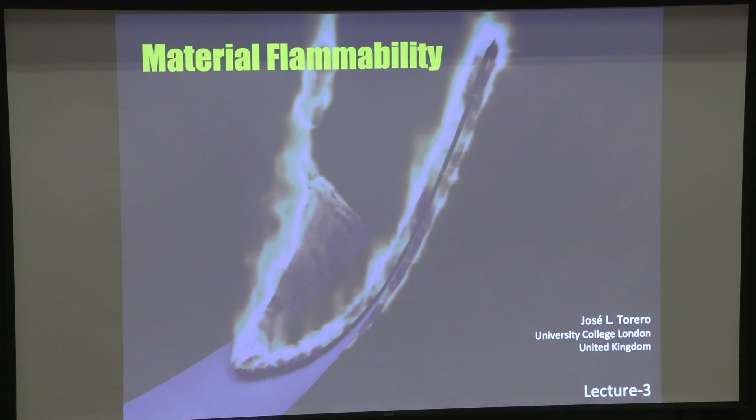And so as I described yesterday, we started the class setting up the entire conservation equations. And very rapidly, you realize that it becomes intractable. It is impossible to actually work the problem.

And so we went to the complete other extreme, where we actually simplified the problem to its minimum expression and substituted everything that we could not calculate by some sort of empirical approach, which of course creates a series of limitations.

Now, what I'm going to try to do is bring you somewhere more towards the middle, where I incorporate more of the physics in a way such that the problem still remains tractable, but the need for these empirical formulations not only is less, but where you actually use it, it is to extract properties that are properties by themselves, so that they don't encompass a multiplicity of physical phenomena, but they're just simply a property.

So, for example, finding methods to calculate an average thermal conductivity of a material that is degrading, which generally is quite a complicated thing to do.

So, in essence, it's sort of trying to move away from this space of the impossible, which is the full resolution of the conservation equations that is completely intractable, because you are resolving nanoscale and nanosecond processes in a domain that basically is of the order of meters and hours. So your entire domain is too big for the time steps and the resolution that you need if you're going to resolve all those equations.

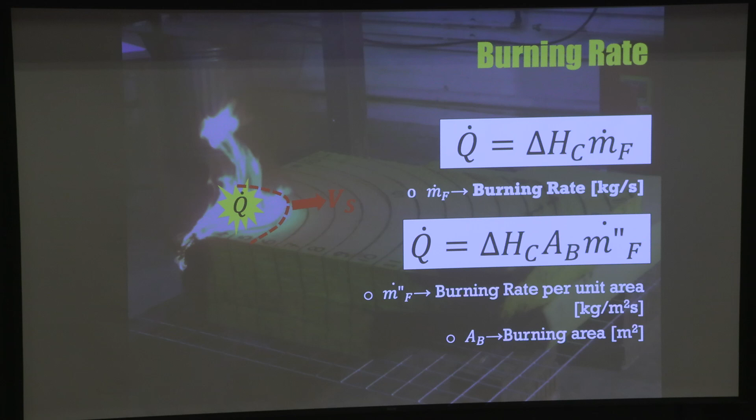So the heat release rate is going to grow in time as a function of how the burning area is increasing in time. And we established the area as a function of a flame spread velocity. We input this into the equations and effectively treated all these terms as material properties.

Pi is obviously a constant. The heat of combustion, we treat it as a constant. The flame spread velocity as a constant and the burning rate as a constant, and therefore lumped all this into a term called alpha. And that basically gave me the dependency of the heat release rate as a function of time. And that's what served as the input to the zone models.

Now, we're going to try to look at this problem in a slightly more refined way. So the material properties, to be introduced in the design fire, that is the one that goes into the zone model, are effectively this: heat of combustion, flame spread velocity, and burning rate.

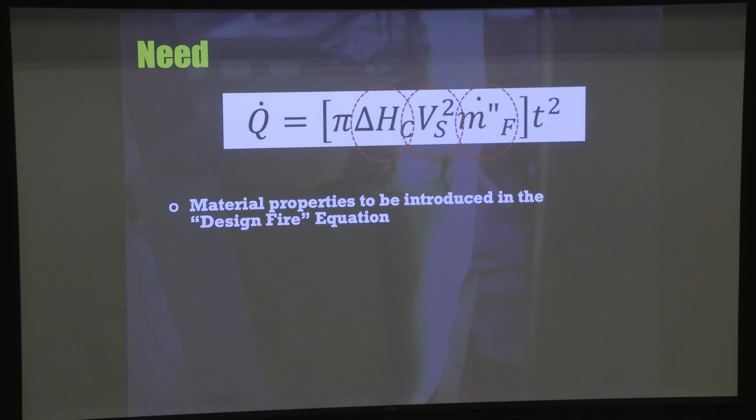Now, what we're going to do is try to use small-scale tests to gather the information about these properties to see effectively how they can be better approximated, as opposed to just simply lump them into a term called alpha. So the information that we're going to extract from this test is much easier to extrapolate so that you can actually predict the value of alpha.

As opposed to just simply getting a value of alpha from a test, you're going to calculate all three components and find the value of alpha in a more refined manner.

So why is this important? Because many materials that we use are going to be evolving rapidly as technology evolves, and as the architectural imagination takes control. So this is an interesting problem.

This is a library, the library of Astana. Astana is the capital of Kazakhstan, and they wanted to create a series of exceptional buildings to adorn this new capital. They moved the capital from Almaty to Astana, and wanted to create all these buildings, and this is one of them.

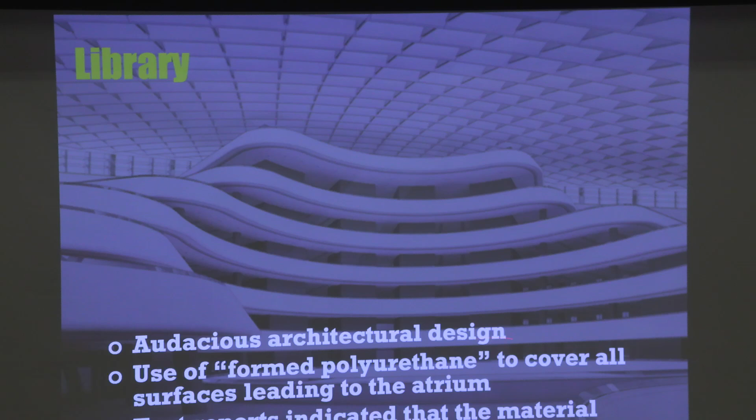The architect is the famous Sir Norman Foster, and he came up with this design, which is a very lightweight lattice ceiling, and every one of these floors represents one level of the library. These smooth surfaces are all made out of molded or formed polyurethane.

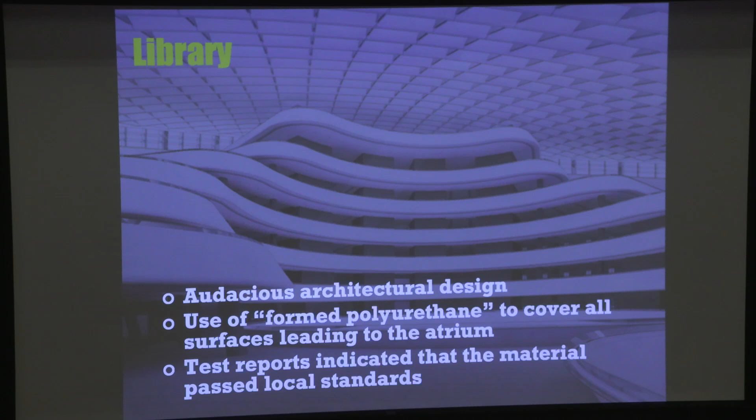Polyurethane can be lightweight, open-cell polyurethane like you have in this chair. The polyurethane in this chair is open-cell, so when you sit and squeeze it, the air comes out. But if you want to make it rigid, you make it closed-cell, and you get the same material, but it's actually very stiff. You can mold it and create these beautiful shapes.

But polyurethane burns, and when it burns it creates a big problem in terms of fire. So what they do is render it with a ceramic, which is there to protect it. The problem is that if you test the components by themselves, they'll tell you the polyurethane is combustible. But if you test it as an ensemble, you can argue that the encapsulated polyurethane is non-combustible. So the question is whether polyurethane encapsulated in ceramic materials can actually be used for a library.

What do you think is the answer? I think you have to be very, very careful, and this is the kind of problem we face. So look how this material behaves when you actually expose it to heat.

The material is called Dekpol, and we tested this.

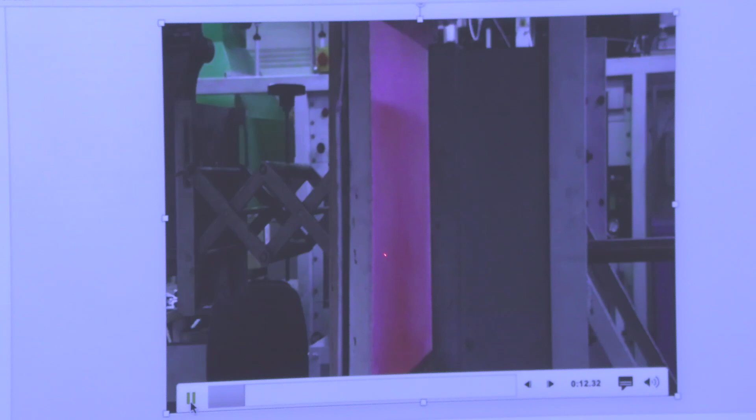So that's the material, and there's a radiant panel radiating heat to it. Very rapidly, little cracks start appearing on the ceramic render, and it starts creating holes. Eventually it exposes the polyurethane, and at some point the polyurethane, now gasifying because it's pyrolyzing, is going to ignite, and you get a big flame. Now imagine the whole library cladded with this -- you'd have a very, very significant problem. These are the kinds of things we want to understand.

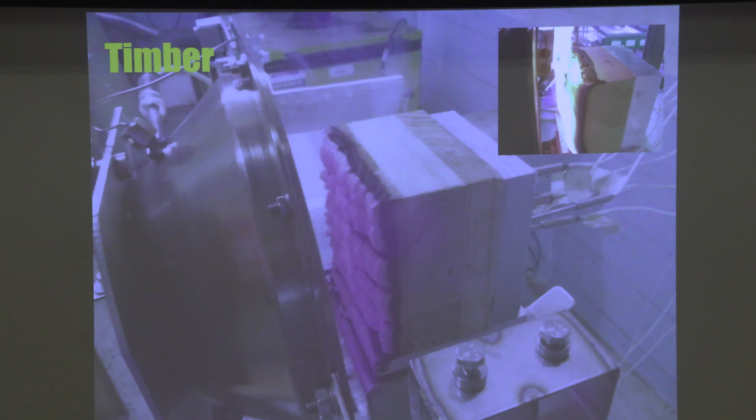Now you have a whole bunch of processes happening. You're going to have a drying wave -- you can see the line that is drying here, and here. It releases the moisture of the timber, followed by the pyrolysis, followed by the char oxidation. This is a heater providing enough heat, so you can see the ash forming on the surface, then the charred part, then the pyrolysis front, and right around here the moisture front. These materials all behave in complicated ways.

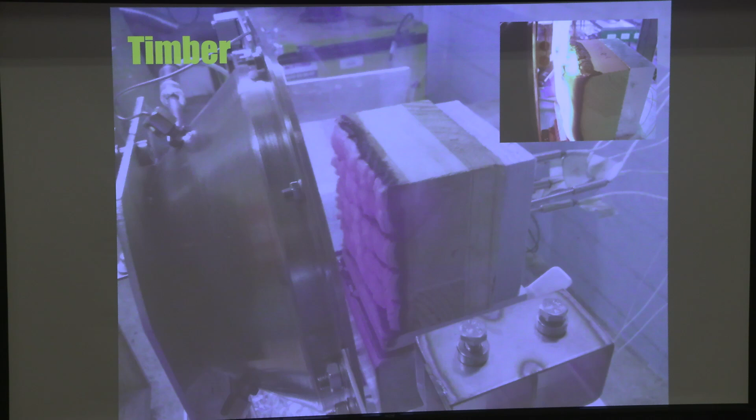Now, when you arrange them in a complex way in a building, they behave in a different way. So let's see if this works.

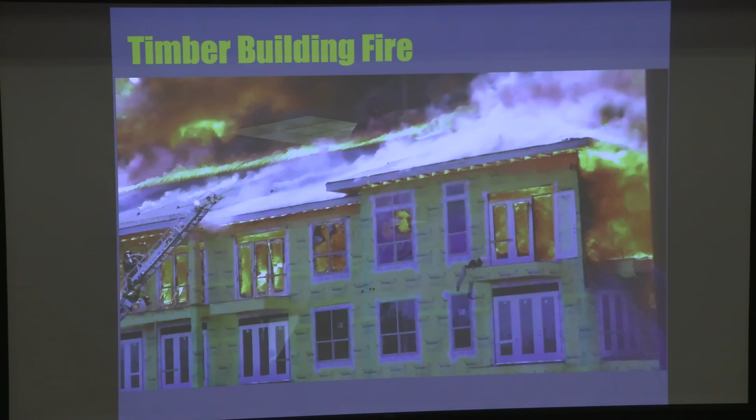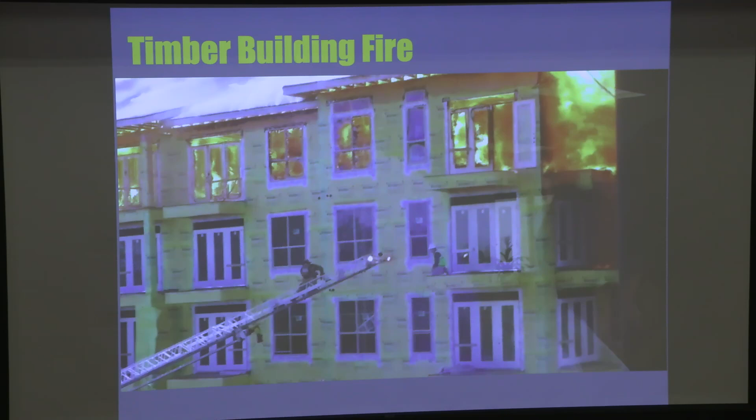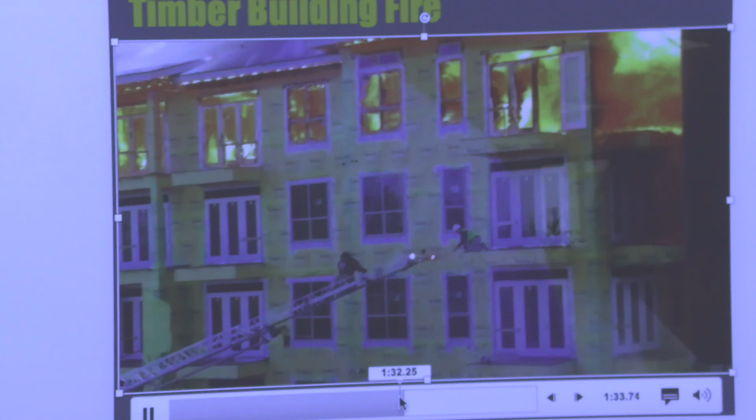Oh, you may not be able to... you can jump from there. I mean, good grief. I'd be jumping, man.

They need to move that truck up. Oh my God, I don't know why they're not evacuating this. I think we probably should be going. It's not time to evacuate, guys.

Just jump for it, man. Hell yes. Oh, thank Jesus. Thank you, God.

Oh my God. Oh no, my God. Oh.

Hey, what about this guy? What about this guy? They got him. Oh, okay. Oh yeah, it's hot. Oh Jesus, did you feel the heat? I think it's time for us.

As you can see, timber can be a massive problem, and all these things need to be characterized properly. For that, we need more than this very simple approach—fire growth models don't apply to any of these things. We need to dig deeper and find things that are inherent to the materials themselves, not necessarily combinations of different physical parameters.

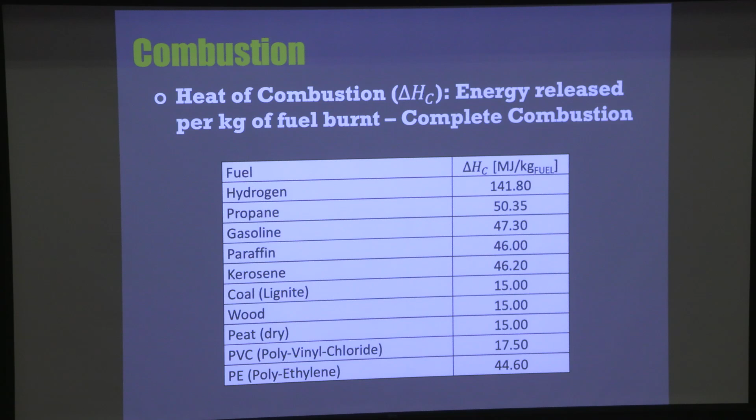Now, we said that the heat of combustion was straightforward—we can do bomb calorimetry and find those values with no problem, so I'm not going to bother with that anymore. In essence, I have three things to find, and this one I already have, so I'm not going to worry about that one.

So let's look at the flame spread. How do I actually estimate the flame spread? This is a little bit of a tricky problem, because flame spread velocities depend on a multiplicity of different things. We need to understand what physical parameters govern flame spread, to see what are parameters and what are physical processes.

The same thing is going to happen with the burning rate. The burning rate has a lot to do with in-depth heat transfer and the chemistry of pyrolysis of the material, and is therefore subject to a number of physical and chemical processes. But at the same time, there are certain parameters that I can extract to produce a model for the burning rate.

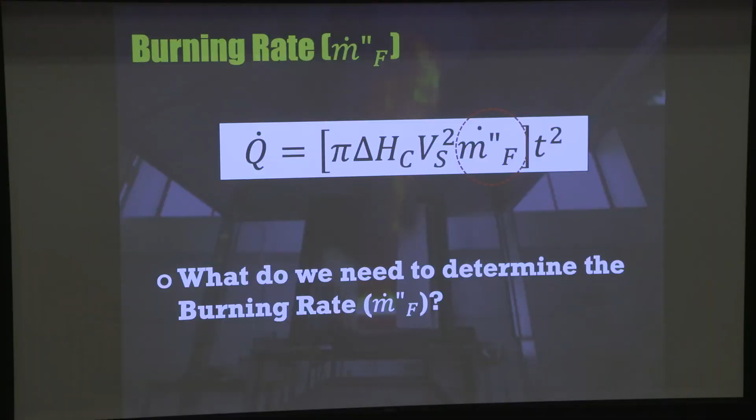This scenario is called opposed flame spread, because the flame is moving in one direction while the air and fuel are moving in the opposite direction towards the flame. If you stand in a frame of reference at the leading edge of the flame, the air and fuel will be moving towards the flame, in opposite direction to the spread.

Now, there was a big debate in the 1970s about in which direction the heat goes through. There was a whole group of people led by Forman Williams, who effectively said that the dominant mode of heat transfer is through the gas phase. And there was a whole other group of people led by this gentleman in Spain called Sánchez Tarifa, who believed that the majority of the heat went through conduction, through the solid phase.

To settle the dispute, Sánchez Tarifa, who was cousins with Amable Liñán, who was very friendly with Forman Williams, decided to send his nephew, Carlos Fernández-Pello, to work with Forman Williams. The result of that collaboration is a very, very famous paper called 'Controlling Mechanisms of Flame Spread,' where, of course, as you can imagine, Forman Williams was right, and from then on, people consider that the major form of heat transfer is from the flame through the gas phase and through the surface of the solid.

Now, years later, people have been doing massive amounts of experiments, and what you end up realizing is, of course, if I increase the thermal conductivity of the material massively, in some cases it can be through the solid. And in most cases, a combination of both.

But let's assume that the heat is going in this direction, through the gas phase. Most fire-related materials will have low enough thermal conductivities that generally the majority of the heat comes in through the gas phase. So energy comes in through the gas phase and is delivered to the solid to bring its temperature from ambient temperature to the pyrolysis temperature or the ignition temperature. And when that happens, the flame can jump to this point and effectively has spread, and that happens at a velocity Vs.

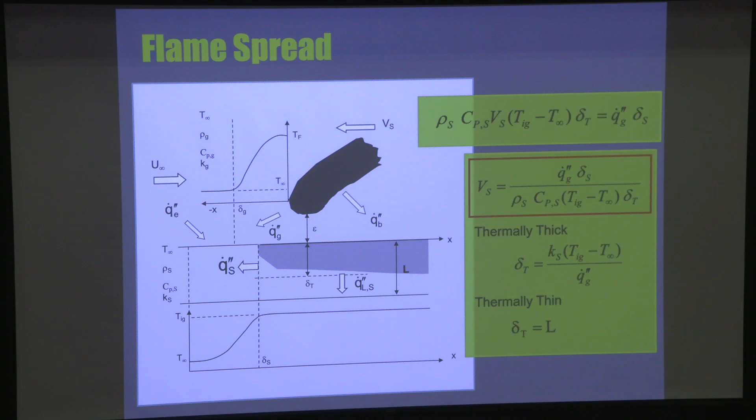And I can substitute this into this equation here and calculate the flame spread velocity. Now, if you look at the model, while it's very, very simple, it does capture the physics. And it leaves you with parameters that are real. So the parameters are Cp, K, all these are things that actually are true material properties.

Not the flame spread velocity as a material property, because the flame spread velocity is not a material property. Because if I change the velocity of the air, for example, I will change the value of the flame spread velocity. If I change the orientation, I would change the value of the flame spread velocity. Now, all the terms in here, to some extent, represent material properties.

Now, the only problem here is that some of these parameters I cannot calculate. So the heat flux from the flame, I can probably estimate, but I cannot calculate properly. And these heating lengths, again, are actually a little bit complicated to establish, and they are not material properties either. So this is better than what I had before, but it's still not a complete picture.

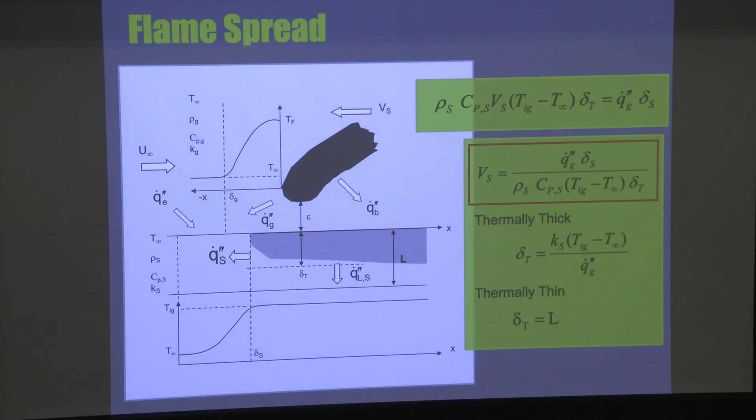Now, obviously, depending on the materials, you will have to see if it's thermally thick or thermally thin. And I presume you've all taken some heat transfer class, so I'm not going to dwell too much on this.

But effectively, we use the boundary condition to calculate a Biot number. So basically, the thermal boundary condition at the surface, convection equals to conduction. Then I linearize the terms, and then I set up the ratio of the gradients, and what emerges on the other side is the Biot number. And the Biot number basically tells me whether it is thermally thin or thermally thick.

In a thermally thin material, the entire material is more or less at the same temperature, so Ts minus Tb is almost 0, and the difference between Ts and the hot gases is very large, so your Biot number tends to 0. It's much, much less than 1.

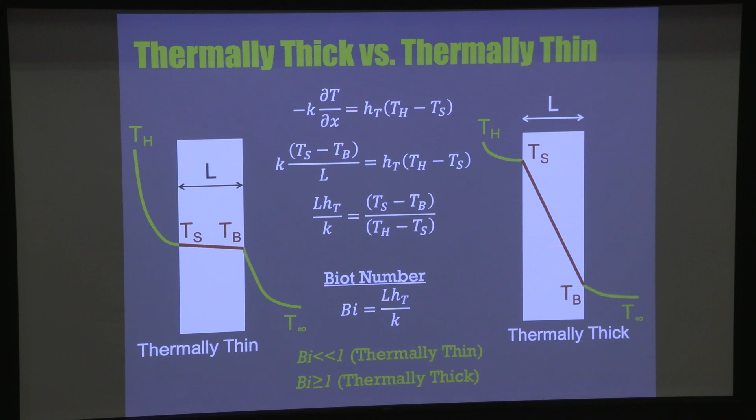Well, if you have this case, which is the thermally thick, the Ts minus Tb is very big, while Th minus Ts is very small, so you get a big number divided by a small number, your Biot number is much greater than 1. So for fire problems, most materials are thermally thick, okay? So generally, we're going to be operating with thermally thick materials, but we can verify it using a Biot number.

So as I said, if most materials are thermally thick, I can take the equation for delta T with the linearized conduction and plug it into this term here, and I get an expression for the flame spread velocity.

Now, that expression for the flame spread velocity has the thermal properties of the material, which are real properties, the ignition temperature or pyrolysis temperature of the material, which is a material property because it's the way in which the chemistry gets degraded and when I consider that I start pyrolyzing the material. Now, it is not a fundamental property, but it is a good approximation to have an ignition temperature.

And then this weird oddity here, that is the combination of the heat supply times the area through which the heat comes through. And that becomes really the most complicated part of the whole problem.

Here I have an expression for the flame spread velocity. The way I'm going to handle it is I'm going to lump this into what I call the flame spread parameter, phi.

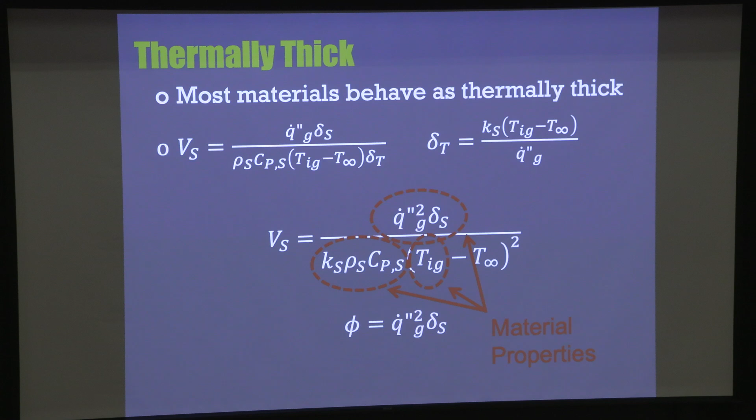If I just take simple timber, this is a bit of a mess. There's going to be a lot of phenomena. You're going to have smoldering at the surface creating heat feedback, degradation chemistry, heat transfer, mass transfer of fuel coming out and oxygen diffusing in. You're going to have water evaporation, which is not a very homogeneous process because, for example, in the nodes of the timber, you get privileged migration of water. So it's a very complicated problem.

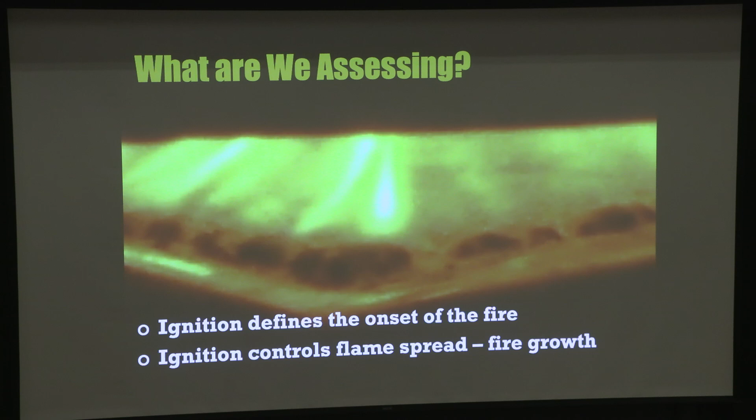So that simple expression that I've created for flame spread is one that already simplifies the problem enormously. So what are we assessing here? Ignition defines the onset of the fire. Ignition is going to control the flame spread because it is in the equation. But ignition is very complicated.

If I look at a piece of timber and all the different phenomena occurring in it, you're going to have diffusion of oxygen to the inside, pyrolysis gases coming out, changes in concentration of the fuel, changes in concentration of the oxygen, and radiative losses from the surface.

You might be applying a heat flux from the outside, you get convective heat transfer, a temperature gradient to the inside, and a change of permeability of the material as you progress inside. Very close to the surface, the material is very porous, so the permeability is high, but as you get deeper in the timber, the permeability decreases up to the point where it's actually negligible. Together with all this phenomena, you're going to get things like cracking, which is mechanical behavior that is very difficult to predict.

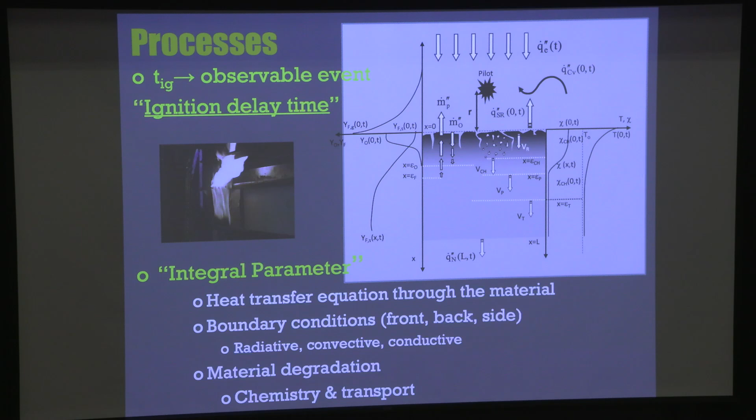So this is not an easy problem. Again, we have to try to simplify it, and we're going to treat it first as a one-dimensional problem where we impose a heat flux. There are losses at the back, and I'm going to try to resolve this problem for a constant heat flux.

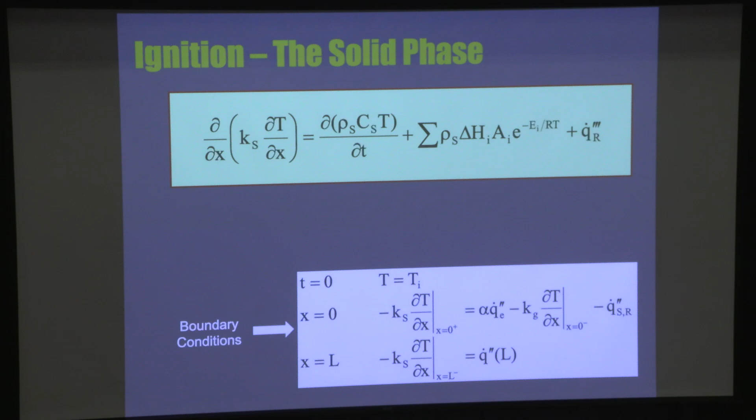The energy equation is going to be conductive heat transfer, the change of enthalpy, the energy absorbed by the pyrolysis reaction in an Arrhenius form, where delta H-i is each pyrolysis reaction, because you will have multiple pyrolysis reactions occurring, multiple steps. Some materials will actually absorb radiation in depth - for example, many plastics will allow radiation to go in depth into the material, so you have to treat this as an absorption term occurring in every control volume. So you're going to have conduction, generation, in-depth radiation, and energy accumulated.

Your boundary conditions are going to be an initial condition, t equals 0, T equals Ti. At the surface, you are going to impose an external heat flux that partially is going to be absorbed if the absorptivity is alpha. You're going to have heat losses to the gas that you can approximate as convection, but let's assume it's the correct term, which is conduction to the gas because you have a non-slip condition, and basically surface re-radiation, which is radiation from the surface to the outside. In the back, you will have some generic term of heat losses. That's the equation that you need to solve.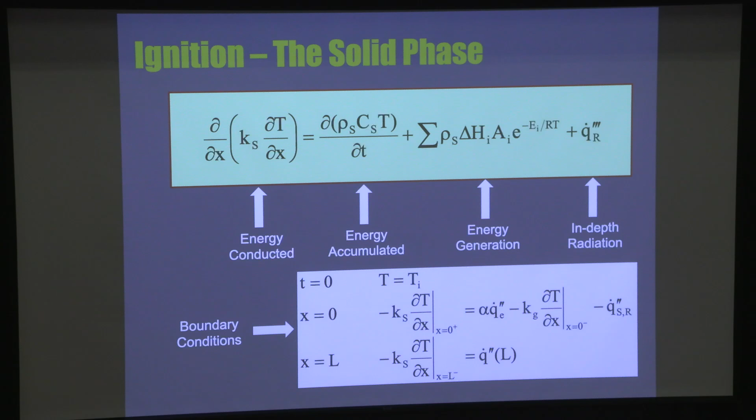Again, I've already simplified a number of phenomena, haven't taken into account any of the mechanical phenomena, just simply taken into account the thermal aspects of it. Now, what I want to get is the amount of fuel that is being produced, because that's what's going to react with the oxidizer to produce the flame. That amount of fuel being produced is the summation of all the Arrhenius expressions representing pyrolysis, multiplied by the fuel concentration, a mass fraction, because part of the fuel will actually be oxidized in depth.

So this number is not going to be 1, okay? It's going to be a number that approximates 1, but it's not going to be 1. Many times, the pyrolysis reactions come accompanied by some oxidation reactions, so what you're going to get is only a fraction of it that comes out as combustible.

And then you will have some CO2, some CO coming out, accompanied by the permeability. Depending on where you are in depth, you're going to have a different permeability, and therefore you need to solve this. Now, this permeability function, again, is very difficult to obtain, and you have to integrate through the depth of the material. So basically, that's the set of equations.

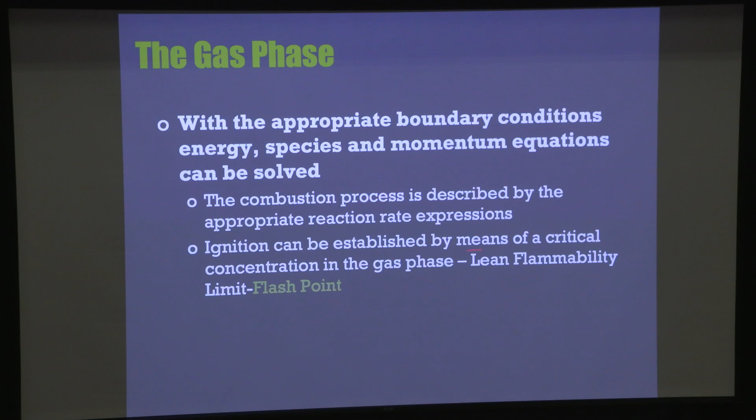Now, in the gas phase, with the appropriate boundary conditions, you can probably use CFD and solve what is happening at the flame level. The combustion process can be described by the appropriate reaction rates, and ignition can be established by means of a critical concentration in the gas phase. In other words, when you reach the lean flammability limit, that's what I described on Wednesday as a flash point.

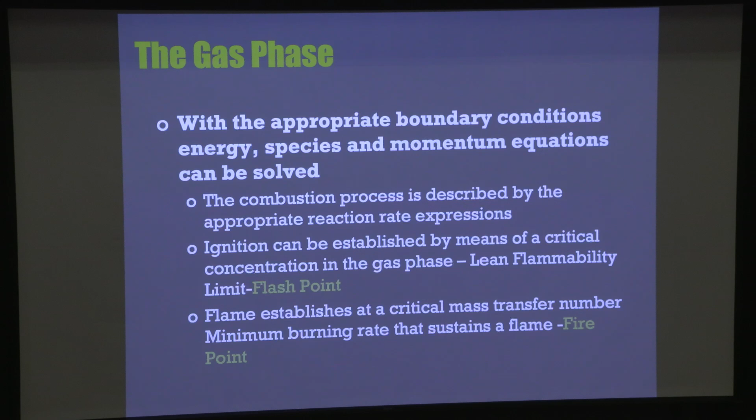So then the flame establishes, you get the flash, and then if you have sufficient amount of fuel burning, the temperature of the flame is sufficiently high, and the flame stabilizes, and that is called the fire point, which is when you actually don't get a flash, but you get a stable flame established on top of the material. And that is more related to a critical mass transfer number, because the heat being fed back to the material has to be more than what you need to pyrolyze the material, so that you get the stable flame.

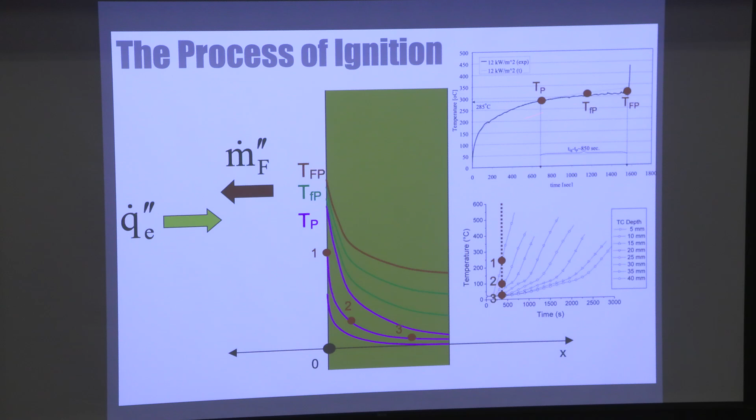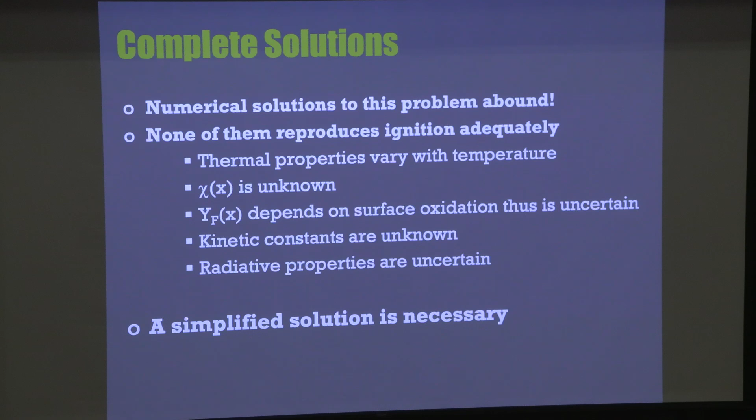So, in essence, complete solutions are very difficult, so I need a simplified solution, and I'm going to use this concept of inert heating as the way to achieve that simplified solution. So effectively, what is what I do?

Ignition delay time, the time it takes from exposure to ignition of a flame, which is a visible event, is going to be the time it takes to reach pyrolysis, then the time it takes to have a flammable mixture, and the time it takes to heat up the flammable mixture until it ignites.

So the first thing I'm going to do is ignore this TI, the induction time, by introducing a pilot. So the moment I get a flammable mixture, it ignites. That's really good because it gives me consistency in the data, since having a pilot, I'm not subject to, for example, the difficulties of heating a gas where you have a buoyant flow that can be quite complicated. So effectively, I can make this one neglectable.

This has been evaluated by a number of people, and it's been shown to be less than 5% of the heating time, because the heating time until pyrolysis is the heating of a solid. So it's actually a very long period of time compared to reaching a flammable limit, which is basically the Arrhenius equation taking off, and that happens very rapidly. So basically, Tm and Ti become neglectable, and the moment you reach pyrolysis can be assumed as the ignition point.

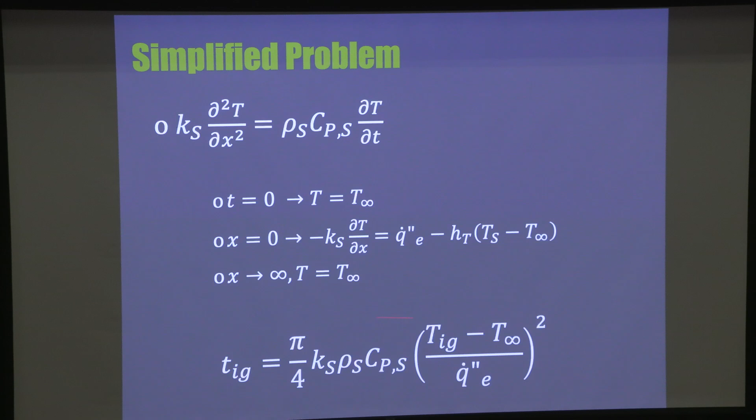So this is the equation to be solved, the transient heating equation, and these are the boundary conditions. Now why am I doing this? Because I can solve this. I can do a Laplace transformation and a Taylor series expansion, and get an analytical solution. This equation, presented in this form, has a closed form solution, and therefore allows me to come up with an answer for the ignition delay time.

Now when you look at the ignition delay time and the answer, here you have the product of the thermal conductivity, the density, and the specific heat, which is the same thing you saw in the flame spread equation. You have T ignition minus T infinity, which is the same thing you saw in the flame spread equation, and this is the external heat flux that you are applying.

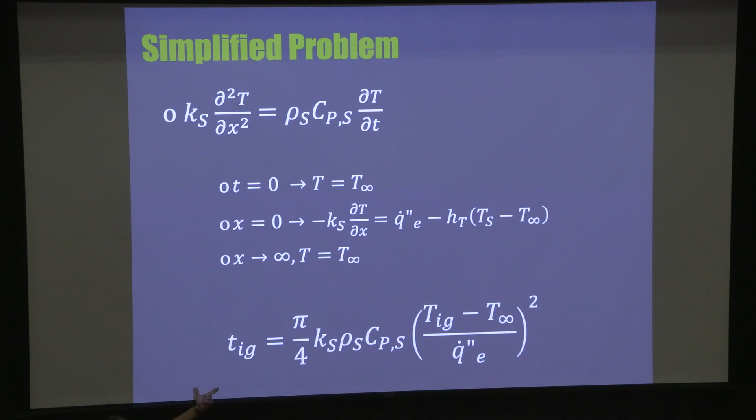Now, the ignition delay time is something I can observe. This is something I can measure, and I can measure it very accurately. So imagine you have a solid that you want to test. You have a radiant panel that provides a constant heat flux, and you put a shield, so that shield keeps it cold.

And then at some point, time equals 0, you remove the shield, and then you wait until a flame ignites with a pilot at the top to make your induction time negligible. So I can measure the time to ignition in a very precise way.

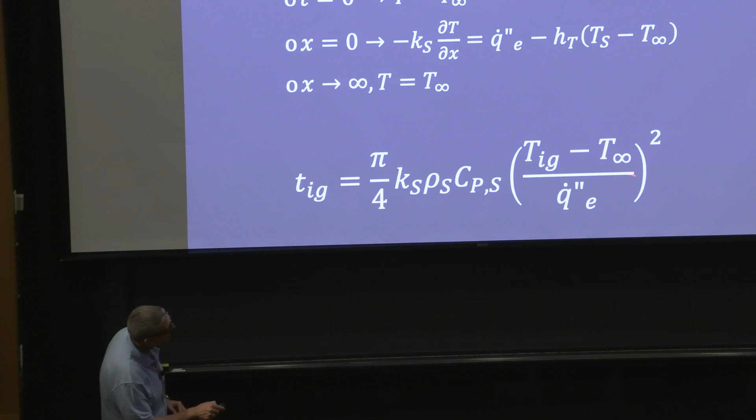So this becomes measurable because I'm imposing the heat flux, and I can do it for a lot of heat fluxes. So I can change the heat flux and repeat the experiment and measure this in a very simple, observable way.

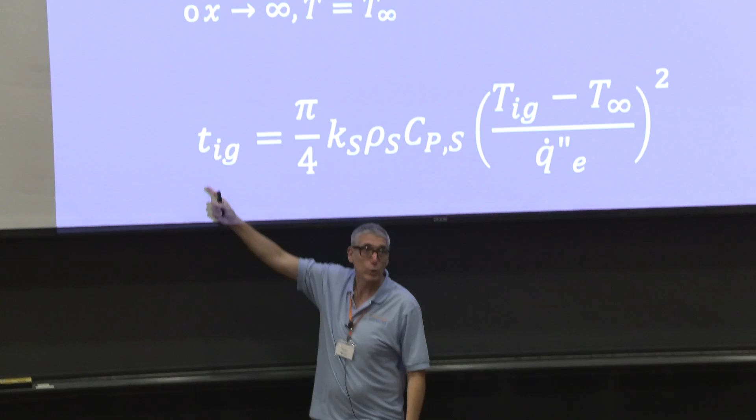As a result, by knowing this too, all that I need is 2 data points to be able to solve this equation. So I put a heat flux of 20 kilowatts per meter squared, and I measure an ignition delay time of 400 seconds. Then I put 40, and I measure an ignition delay time of 200 seconds.

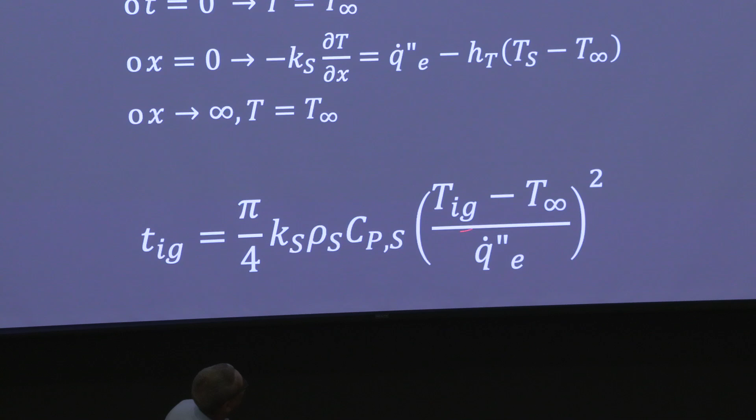Now, with 2 equations and 2 unknowns, I get the thermal inertia, and I get the ignition temperature, which are the 2 things that I need to plug into my flame spread equation. So the material properties end up being this, and I'm going to run tests to find this, which allows me now to calculate the flame spread velocity.

So the burning rate is a little bit more complicated. Again, it's the burning rate per unit volume multiplied by the volume, and you have to add the whole thing, but generally it follows a pretty complicated plot that evolves in time.

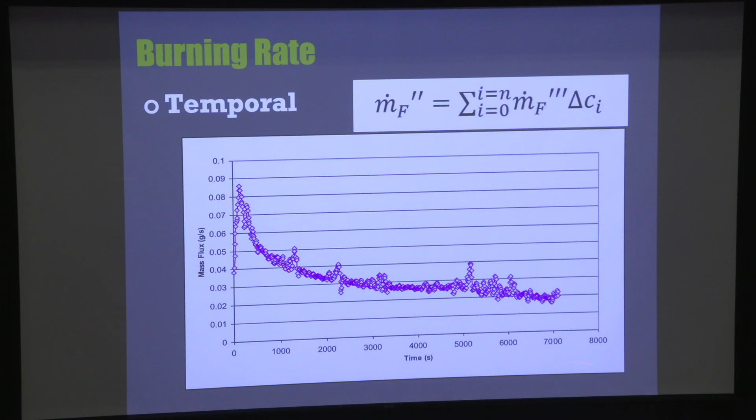The way I normally assess this is by indirect measurement, and this is what we call oxygen consumption calorimetry, and it is the heat release rate. So it's an indirect measurement. So how do you obtain it?

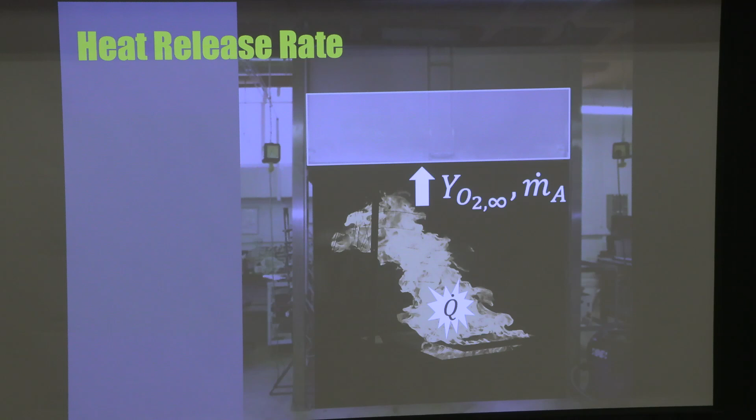Basically, you measure the heat release rate, and you do it not by putting a load cell or a scale, but by actually measuring how much oxygen gets consumed. So if I measure the mass fraction of oxygen in and out of a control volume, and I know what the mass flow rate is, I can actually establish the heat release rate. So this is what I'm going to be measuring, and this is a much more precise measurement than measuring the burning rate.

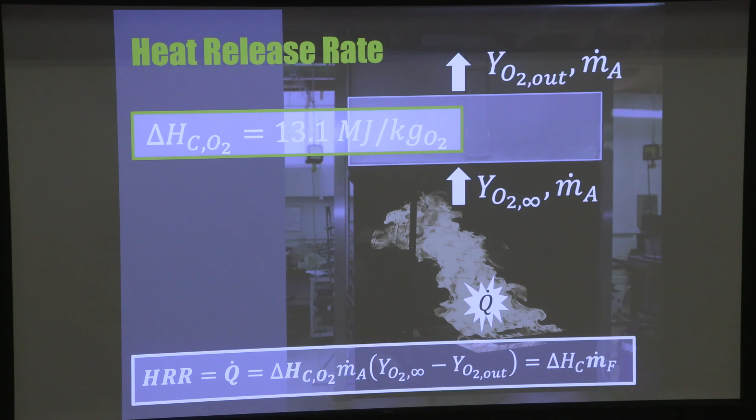Now, I need to find the heat of combustion per kilogram of oxygen, which is effectively a constant value. The same way that you have the heat of combustion per kilogram of fuel, if you put your equation, you can convert it into the heat of combustion per kilogram of oxygen. That gives you a constant value independent of the fuel.

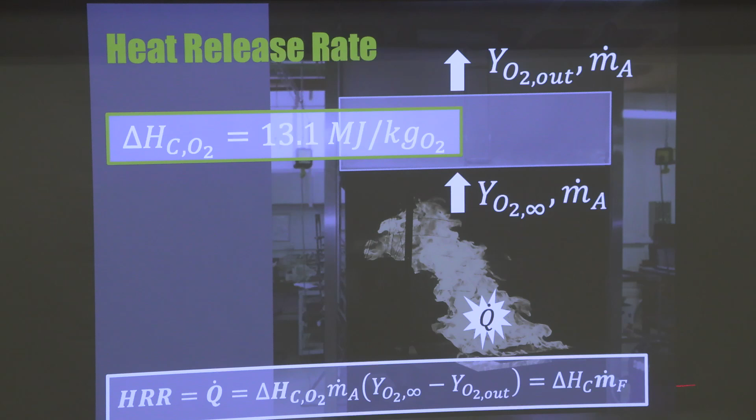So by doing so, I can measure the burning rate in an indirect way, which gives me the final parameter. As you can see, these things can be obtained in a way that is more precise than the alpha that we originally had.

And so instead of having everything lumped into an alpha, now I'm going to use the material flammability properties, and I'm going to have a more precise system that actually allows me to calculate things in a correct way. Again, I'm not saying that this is a complete analysis. I'm saying it's the next level of precision.

Now, a lot of these material flammability properties that you have in here repeat themselves in the different parameters, so I have 1, 2, 3, and 4, and I need to be able to establish them correctly.

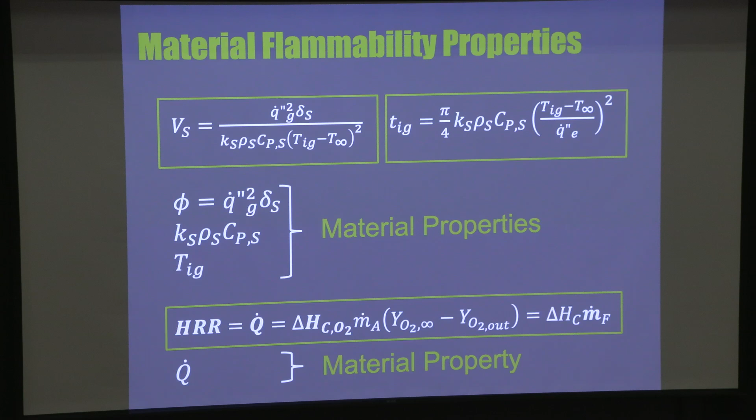So instead of having this very simple, coarse expression, now what I have is a series of equations that have a lot more physics in it, and where the parameters that I'm calculating are actually closer to being parameters, and not necessarily complex physical phenomena.

So what I'm going to do now is show you how it's done in a standardized way. These things have been standardized so that people can repeat them and verify them in an appropriate way. And I'm going to look at ignitions of both liquids and solids, and how you find these different parameters.

So the simplest of them all is the liquids. I don't know if you're familiar with this. This is a Pensky-Martens closed cup test, and basically gives you the flash point temperature.

Now, what it is, is just literally a bucket that has a little fan in there that is stirring this so that it's a constant temperature. And you provide a little bit of heat from the bottom until you reach a certain temperature. Then you turn this knob around, it opens a little window, it puts a pilot flame, and if you get a flash, that basically means you have attained the ignition temperature. And basically what that reflects is that at the opening, you are at the lean flammability limit.

Now, in the case of liquids, there is no pyrolysis, so this is dominated by thermodynamic equilibrium, so it's Clausius-Clapeyron.

As you increase the temperature, the equilibrium concentration increases until eventually you reach the flammability limit. At that moment, when you reach the flammability limit, the moment that you put the pilot, you will get a flash. That's what's characterized as the flash point temperature.

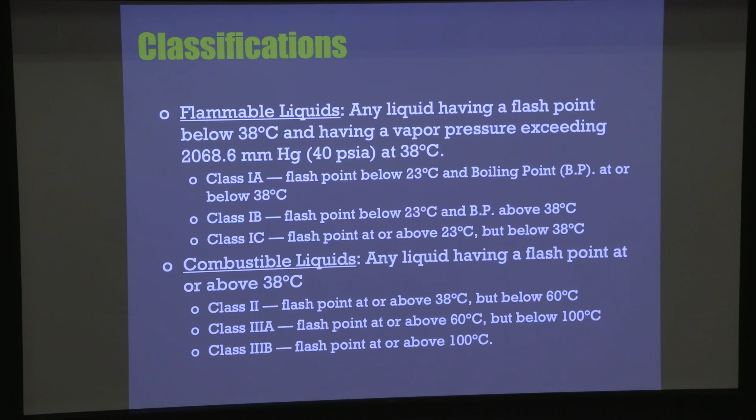Now, what is the practical value of this? You use it for classifications. So it's straightforward. For example, if you have class 1A, the flash point is below 23 and the boiling point below 38. So what does that mean? If I have a material that has a flash point of 23, what is going to happen when you try to store that material?

If you leave it there, it's going to evaporate, and at ambient temperature it's going to produce a flammable mixture, which effectively represents an explosion hazard. Is that okay?

So from the perspective of storage, what do you have to do with materials of the type class 1A? Well, you can bring the temperature down, put them in a refrigerator, below the flash point temperature. The alternative is you enclose them. Enclosures have to be completely sealed, because you cannot have that.

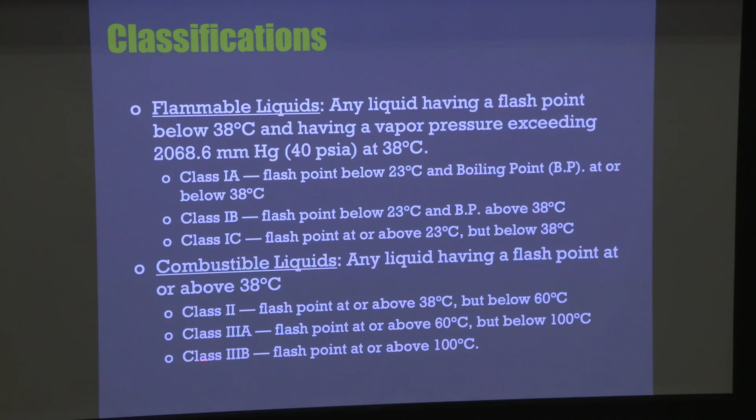Now, as the flash point increases, and you go to flash point at or above 100, these materials, for example 3B, can be stored open, because they will never produce an explosive hazard. So people use this for storage, and NFPA has these ratings that determine what kind of storage you're going to have, depending on the flash point and the boiling point.

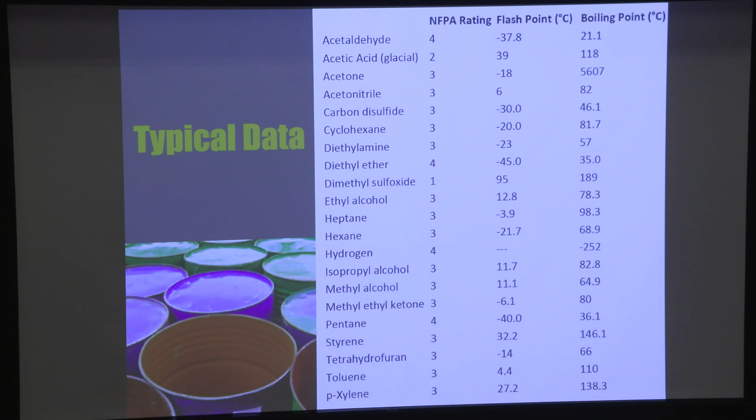Now, why is the boiling point important? Because the lower the boiling point is, the lower the point where you're going to have a massive amount of combustible gases that come out. It's more a reflection of the magnitude of the problem.

So let me look at the test. This is, again, a standardized way of dealing with this problem. This is a standard test, the lateral ignition and flame spread test, and it corresponds to two tests: an ignition test and a flame spread test. The ignition test is a small sample placed in front of a radiant panel that gives the sample a constant heat flux, corresponding to the equation I described before.

Now, the flame spread test has exactly the same arrangement, but now you have a long sample that goes all the way down, and the radiant heater is tilted, so you get a distribution of heat along the direction of the sample. If you're close to the ignition area you have a constant heat flux, very high, but as you progress away, the heat flux decays, so you're measuring the flame spread velocity as the external heat flux goes down. That allows you in one test to collect a number of data points for different values of the external heat flux. This is a standardized test, as I said, using the concepts I described before, but done in a standard way.

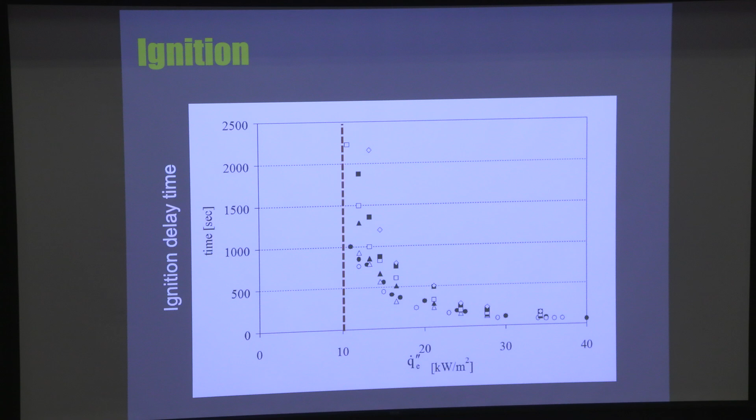So the equation that I showed you corresponds to this type of test data. As I increase the external heat flux, the ignition delay time is going to shrink. As you get to very low heat fluxes, the ignition delay time eventually reaches an asymptote and goes to infinity. So if I look at the data, there's the asymptote, in this case around 10. That's what we call the critical heat flux for ignition, labeled Q0 ignition.

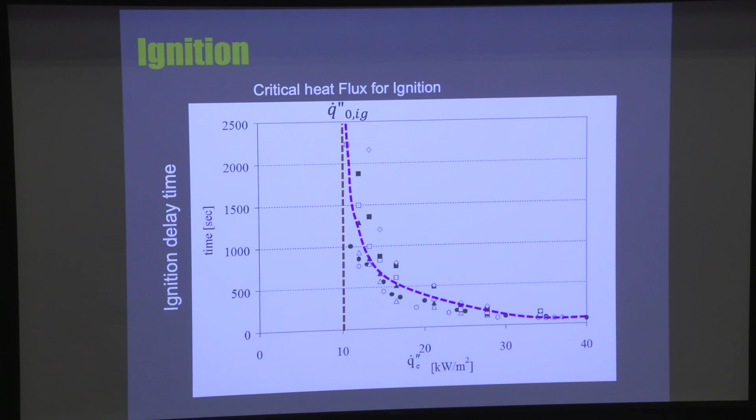Now, as I decrease the value of the heat flux, I still reach ignition temperature before I reach thermal equilibrium, but at every point it's getting longer and longer. So my ignition delay time is getting longer and longer as the heat flux decreases.

Eventually, I will get to the critical heat flux for ignition, and that's where it asymptotes, because thermal equilibrium is attained at T ignition. And if thermal equilibrium is attained at T ignition, then your ignition delay time is going to be infinity. Any value below that critical heat flux, thermal equilibrium happens lower than the ignition temperature, and therefore it will not ignite. So this is your ignition delay time.

If your external heat flux is above the critical heat flux, then you ignite. And if you are below, then you don't ignite. So at the asymptote, the external heat flux is equal to the critical heat flux for ignition, when thermal equilibrium is attained, when the surface heats up to the ignition temperature.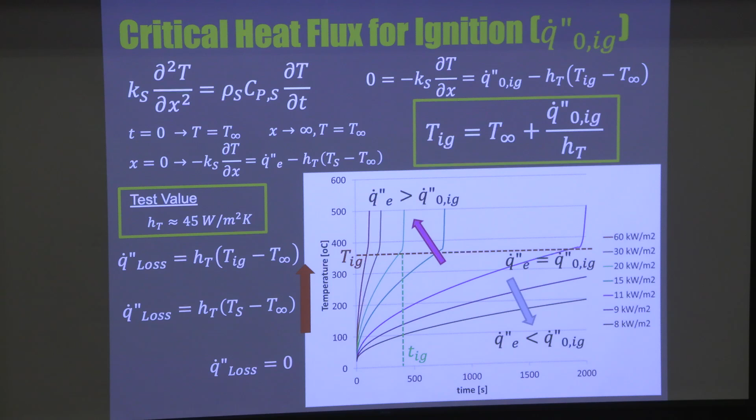Now, this term here, I'm going to measure because I start reducing the heat flux until it doesn't ignite. So I'm measuring, I know what it is. And because I know what it is, and I have measured this, I know what the ambient temperature is, so I can establish what the T ignition is. So that's the problem I'm trying to solve.

This is the equation that I had developed for ignition. And as you can see, the ignition delay time is inversely proportional to the square of the external heat flux. The ignition temperature, I already know it because I estimated the critical heat flux, and from that I got the ignition temperature. I know the ambient temperature.

And I'm going to flip this around. Why am I going to flip it around? If I take the inverse and then the square root, this variable here becomes linear with the external heat flux. Why? Because I want to do a linear regression. So in essence, the only purpose to do this is to get statistical validity by doing a linear regression.

So basically, y equals ax plus b, where in this case, y is 1 over the square root of t ignition, x is the external heat flux, a is all this, and b is equal to 0. So this equation forces the intercept to be 0. This becomes the slope, and basically I can do a linear regression.

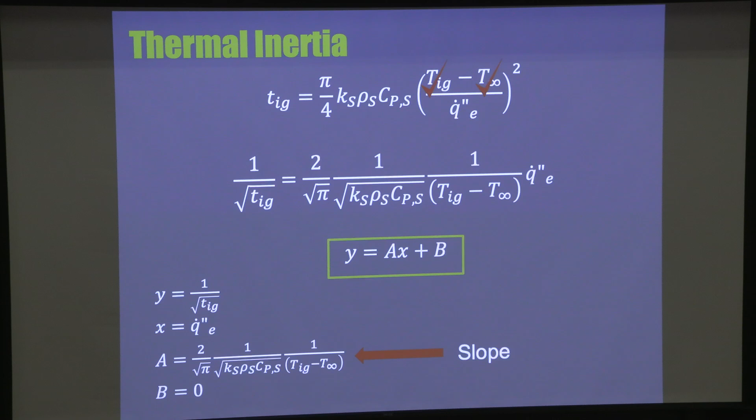Now, in essence, I put all my data in this format. I do my linear regression. I force it to go through the origin, and as a function of that, I have the value already of this, and I know this, I know this, so I know this.

I then plug this in here, and I can extract from the slope of the linear regression a statistical representation of K rho C. So I know all this, and as a result, I can get K rho C.

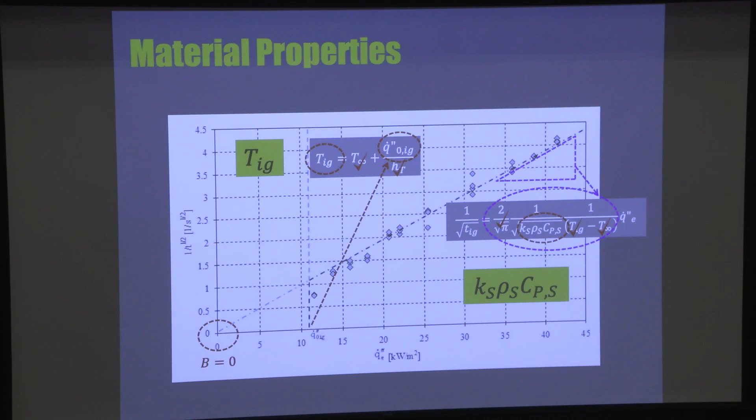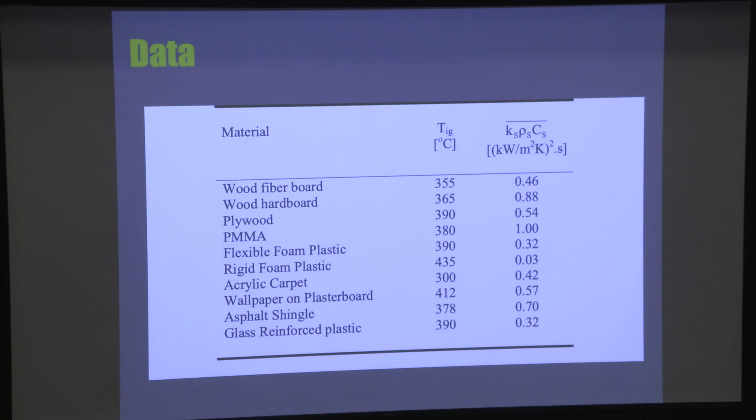That's the way we standardize the process, and we're going to do exactly the same thing with ignition. So you will find nowadays in most fire dynamics books these values tabulated for different types of materials. So what do I have now? I have the parameters, and I have an equation that provides me with the information that I need.

Now, I'm not going to go through the flame spread because it's exactly the same. I'll just flip through the slides. But effectively, what you're going to do now is measure the flame spread velocity.

You measure the flame spread velocity, and the asymptote is the same, because if the material is at ignition temperature, it is already gasifying, so it will propagate at a very high velocity because it's a premixed flame.

At the critical heat flux for ignition, the two asymptotes meet, which allows me to confirm the asymptote. So this is what we call a flammability diagram, and it combines the flame spread data, which is a function of heat flux, giving flame spread velocity, with the ignition delay time data, where the heat flux is plotted against ignition delay time.

Obviously, the ignition delay time requires a heat flux above the critical heat flux for ignition, but the flame spread has to be below, because the external heat flux only accelerates the flame. But if you exceed the critical heat flux for ignition, you end up with a premixed flame, and you get an infinitely fast flame spread velocity.

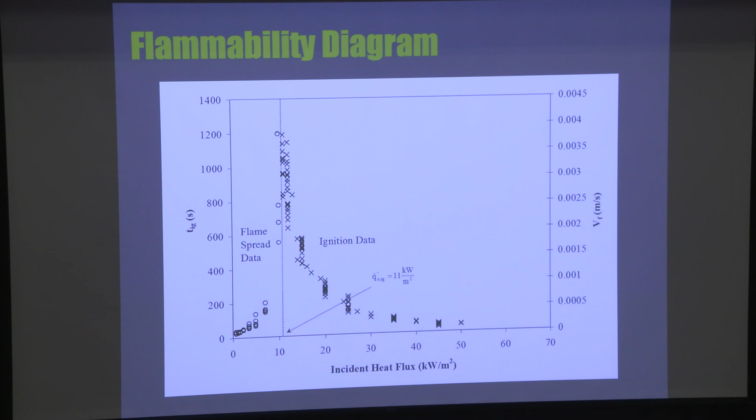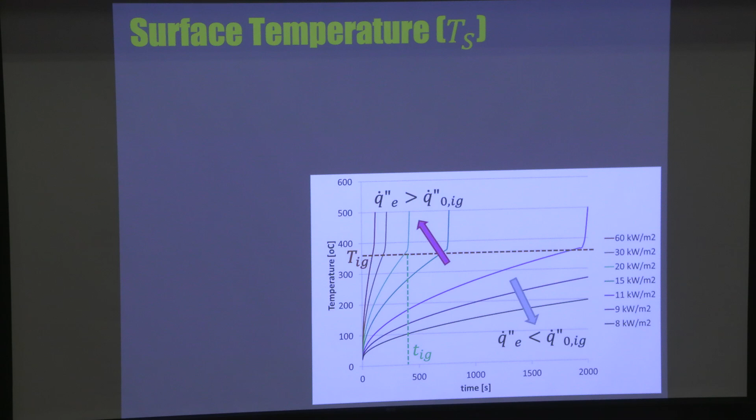So what am I going to do? I'm going to take the data and do exactly the same thing, going through all the steps just as in the previous case. Everything is exactly the same, but now I'm going to make a little bit of a trick here.

To be able to link the external heat flux to the surface temperature, I need the surface to reach thermal equilibrium, which means I will only ignite so it starts spreading after a long preheating period of the sample, so that the sample is entirely in thermal equilibrium.

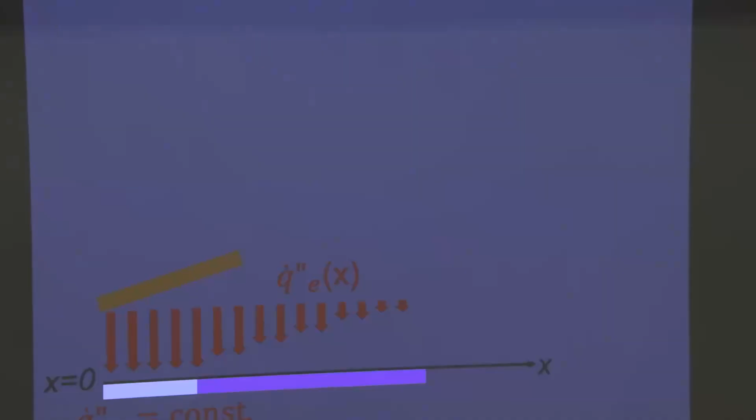And that's just a trick to be able to do the same type of linear regression. Because effectively, here is my flame spread equation, and I need a surface temperature.

So what I'm going to do is add and subtract T infinity to this expression, in such a way that I have T ignition minus T infinity. This relates to the critical heat flux for ignition, and Ts minus T infinity relates to the heat losses, or the thermal equilibrium. So Ts minus T infinity is the energy I'm supplying at thermal equilibrium, while T ignition minus T infinity is the critical heat flux for ignition.

So now I can substitute the critical heat flux for ignition with the external heat flux, and create an equation that allows me to do the linear regression I'm looking for. Now the flame spread velocity is proportional to the square of phi and the square of the external heat flux.

By doing this, I obtain this expression. Now I flip it around again, and I get y equals the slope times x, which allows me to do a linear regression and find the value of phi. So that's the way you standardize the tests, and now you get a table for the values of phi.

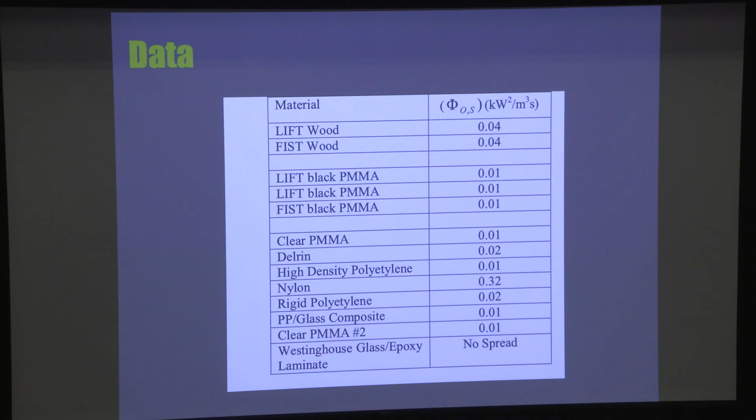So the final one is the heat release rate, and as I said, basically all I'm doing is measuring oxygen consumption on one side and oxygen mass fraction on the other side, and by doing this measurement I can get the heat release rate.

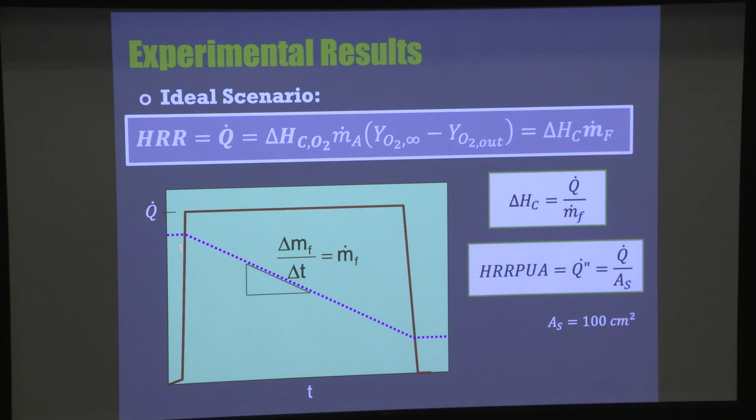That's an easy one, and again I have a test that is completely standardized, called the cone calorimeter, which basically allows you to find the burning rate just by measuring the heat release rate as a function of oxygen measurements that can be very precise.

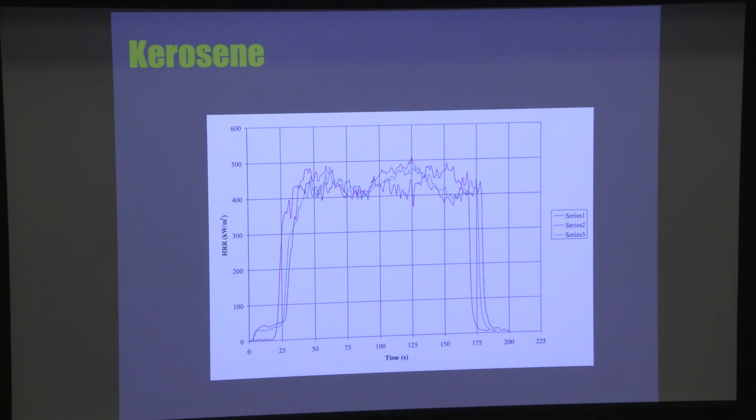So a clean material like kerosene will have a very constant heat release rate, so you can apply the equation perfectly well. But as you start getting more complicated materials, like gasoline for example, that has different components, it starts distilling—you get the first component coming out, then the next component, and then you have to start having a little bit of imagination.

Then you get materials like naphthalene, for example, where you have a phase change. Before, when it's a solid, it has a low heat release rate, but when it becomes a liquid, it has a much higher heat release rate because you don't need the enthalpy of melting. And then you can get to really complicated materials.

These are typical fire-retardant materials that produce chars, many with intumescent chars. This material, for example, has nanoclays inside that create a structure producing a thick layer of carbon, and you're going to see that thick layer becomes enormous eventually. These materials get really complicated—you can see the thickness of the char layer being produced on top.

So instead of trying to resolve things at the small scale, many people opt for going large. These are two large-scale facilities, and you'll find a number of these around the world. I think the biggest one still is the FM Global one. You can put an entire storage rack in there, take your collection, make oxygen consumption measurements, and measure the heat release rate of the rack directly.

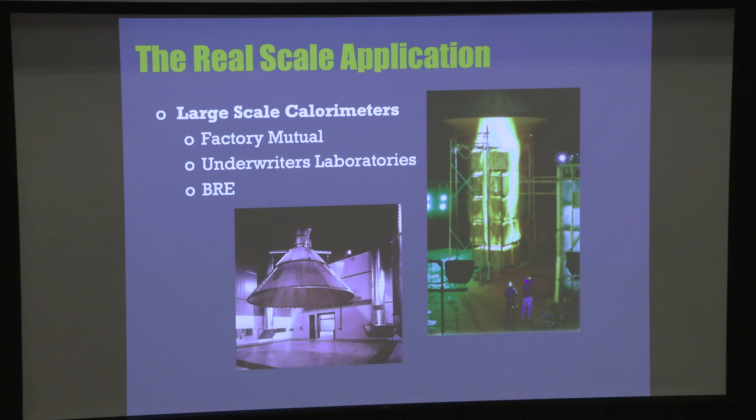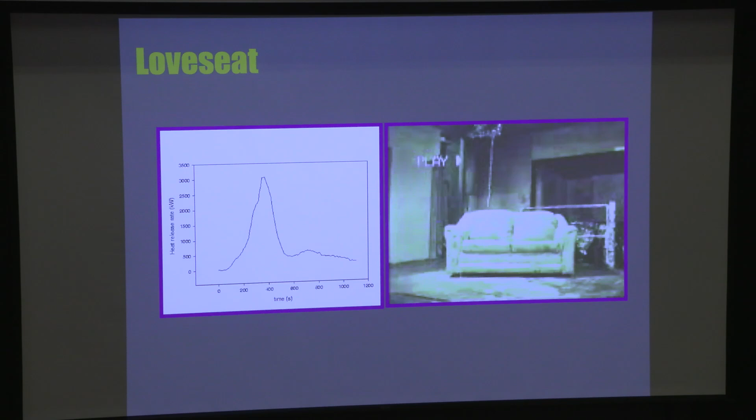This is one in the UK, the Building Research Establishment. It's a lot smaller than the other one, but still pretty big. You can actually put a one-story house in there and measure the heat release rate directly. You can indulge yourself and burn sofas to obtain their heat release rate, or do it for bunk beds, single beds, whatever you want. There's an entire library of these things that people have.

So basically, what have I shown you? That yes, we can go deeper—we can put more physics into the problem, make the parameters more amenable to calculation and of broader use, and resolve the problem at a higher level of resolution. We can even standardize procedures so we can apply appropriate statistics and get values that are statistically valid. But nevertheless, it's just one step forward. We have not resolved a few things, and I left a lot hanging.

And when it comes to heat release rates, what happens? Eventually you quit, and you say, well, just burn the damn thing. That's all we can do—measure whatever you can, and that's what you input into your model. So instead of putting my alpha T-squared into the model, you can simply take heat release rate data from a sofa and plug it straight into your zone model, and you'll get something slightly better. But you will have to burn the sofa.

So in essence, that's where we're going with adding more and more physics to the problem. Now we can go further and introduce a pyrolysis model—there's a whole bunch of people working on pyrolysis models. Instead of treating the problem as inert heating, you can introduce a pyrolysis model. You can use a TGA, or use genetic algorithms to extract your kinetic parameters from TGA data, and then use that as input into the equation, which is no longer an inert solid.